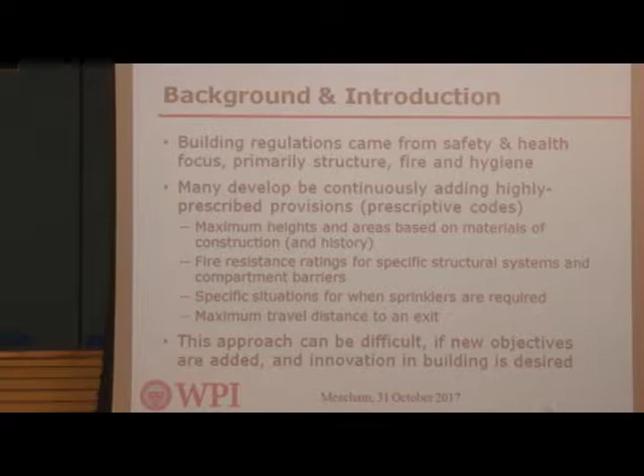Building regulation and fire regulation generally developed out of the health and safety area, because we were very good at burning down cities 100 years ago. So somebody decided maybe we should put in some regulations to try to control for that. We instituted measures like limiting the heights of buildings, the areas, compartment size, trying to make access easy for the fire service, defining how large compartments should be, fire resistance, and we kept adding all of this regulation, specifying everything that needed to occur.

The problem is, in many countries, not all buildings fit that very tight prescription, and it can be difficult to innovate in the design when the regulations are very restrictive.

So starting around 1980, there was a movement to transition to what they call performance-based codes. The idea is that the regulation focuses on societal goals like safety in case of fire. You define a functional requirement, something like provide adequate means of escape given the fire protection systems in the building, and then you put operative requirements such that the fire safety systems in the building shall be designed to maintain a tenable environment for the time it takes people to evacuate.

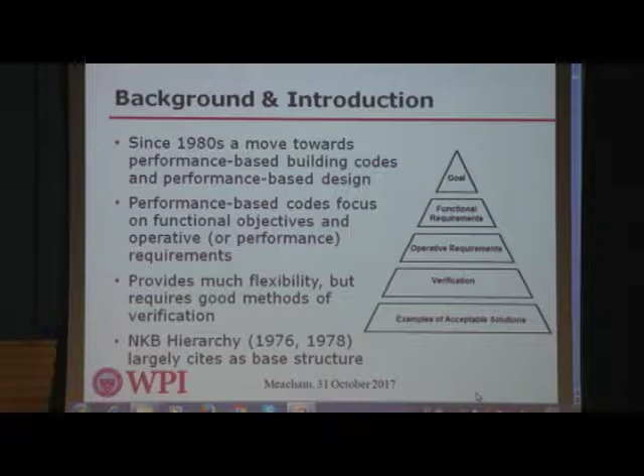So very clear statements of purpose with some criteria that you're trying to judge, and then you have means to verify through engineering analysis, but you also have examples of acceptable solutions, which in many cases are what used to be, or are still called, the prescriptive codes.

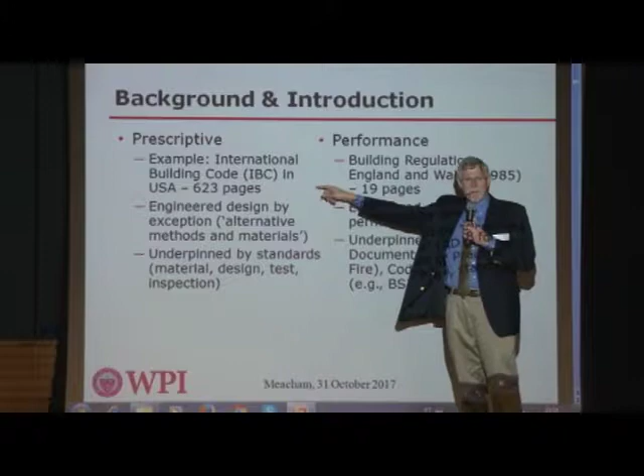You can see a difference, for example, in the United States: the International Building Code is very prescriptive, 623 pages of text to tell you exactly how many meters to an exit, what the fire resistance is, and it works very well if the building looks like a square box no higher than 4 stories. But with very unique designs, it's very difficult.

In England and Wales, the regulation is only 19 pages. It basically just tells you to make the building safe. So we can do engineered design by exception in the US, but in the UK, it's permitted by law.

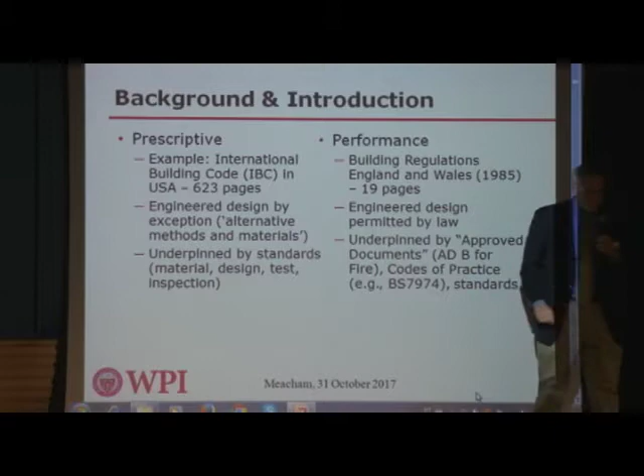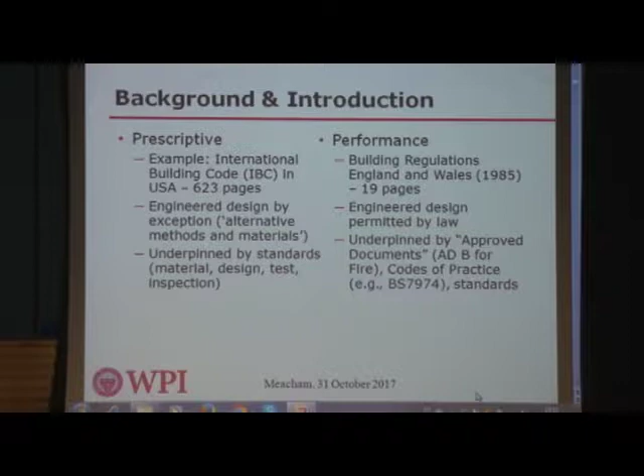Both sets of regulations are underpinned by clear standards for testing of materials, design, and so forth. But it's really an issue of: do you start by telling everybody exactly what they have to do and then allow exceptions, or allow people to do whatever they want and have most default to the very specific guidance anyway? That's really the difference between a prescriptive-based system and a performance-based system.

The prescriptive system is very good for regulators because it's easy to determine by looking at the drawings if the design complies with the regulation. They allow engineering, but it's by exception, and it's a little difficult if you want a very unique design because not all buildings look like a box.

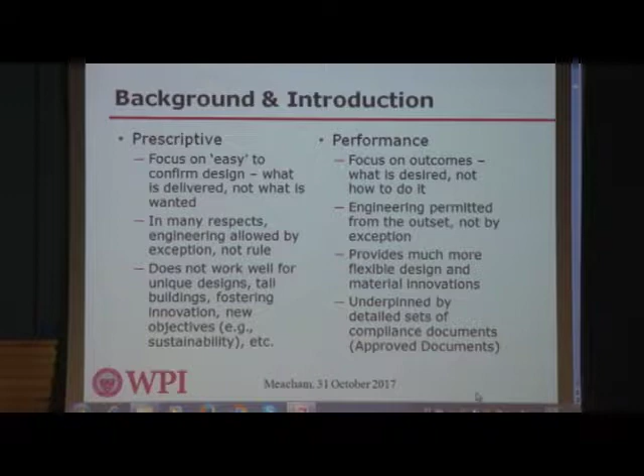Performance focuses on what you're trying to achieve with the building, not specifically how you do that, and it gives the engineer and architect more flexibility, but it's very difficult for regulators and the fire service to determine if the design actually achieved the objectives. So each system has benefits and detriments.

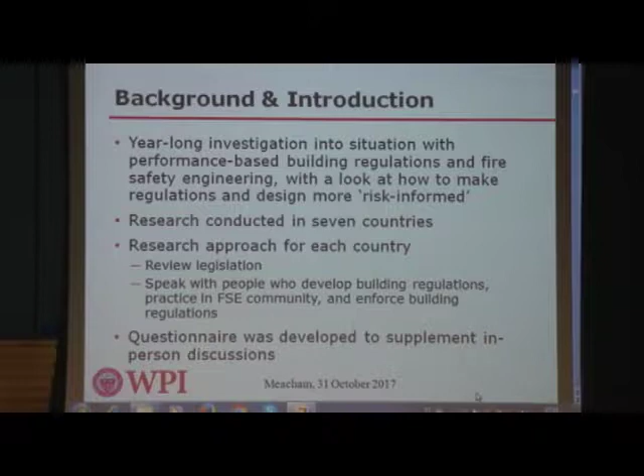So for the past year, I've been going around the world looking at how, in particular, the performance-based building regulatory systems have been working in 7 different countries. I've been talking to regulators, fire service, architects, and engineers, trying to get a sense of what is working and what is not working, and what we might want to look at differently in the future. So I'll go through a few of the countries briefly.

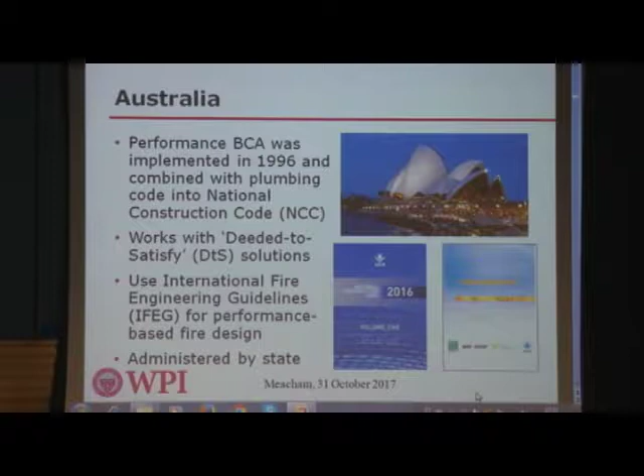Australia has the Building Code of Australia, implemented in 1996, which is a performance-based document. It combines goals and objectives with a prescriptive deemed-to-satisfy component. For engineering analysis, there's the International Fire Engineering Guidelines, which lays out a process for identifying building objectives, developing fire scenarios, quantifying design fires, conducting analysis for smoke and fire spread, and even includes a fire brigade response model.

Within Australia, fire safety engineers are required for design, but they're only required to be licensed by law in one state. This makes it challenging, because without the legal infrastructure to define what competencies the engineer should have, it can allow for bad practice in reality.

Another issue is that Australia allows the use of private certifiers, meaning the government doesn't do the approval like City Hall. A private entity can be contracted to conduct the review and certify the building. In theory, this would reduce cost. In practice, an unethical reviewer can pick design engineers they want and not do a good design or appropriate review. So you have to be really careful with private certification, because the oversight and ethics need to be very high.

We saw earlier a picture of the Grenfell Tower in London that happened this year. But three years ago in Melbourne, Australia, there was the Lacrosse building fire, which had the same combustible exterior facade. They were lucky no one died, but the Victoria Building Commission audited 151 buildings and found that 51% did not comply with building regulations. They saw this as a potential issue with private certification and what could happen without good oversight.

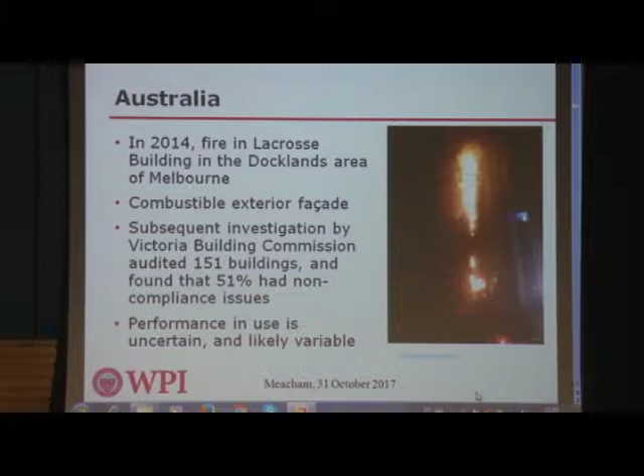The engineers recognize that there are no regulations requiring building owners to maintain their buildings, to require annual inspections, to make sure fire safety management is correct. This is important, because you can do a very good design as an architect or engineer, but if the building owner doesn't maintain the building according to the design, you have no guarantee of the performance expectation.

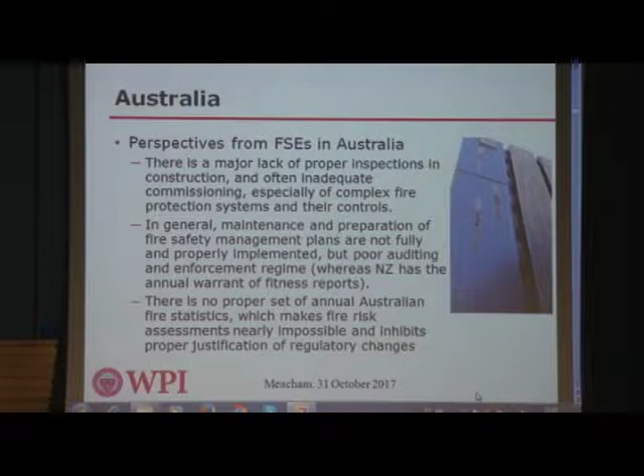Also, Australia does not have a good set of fire statistics. The fire brigade stopped reporting statistics about 10 years ago. It's very difficult to understand how large the fire safety problem is or what the particular components are without good statistics. This should change, because whether in Brazil or any country, when you have the data, you know where to focus your resources.

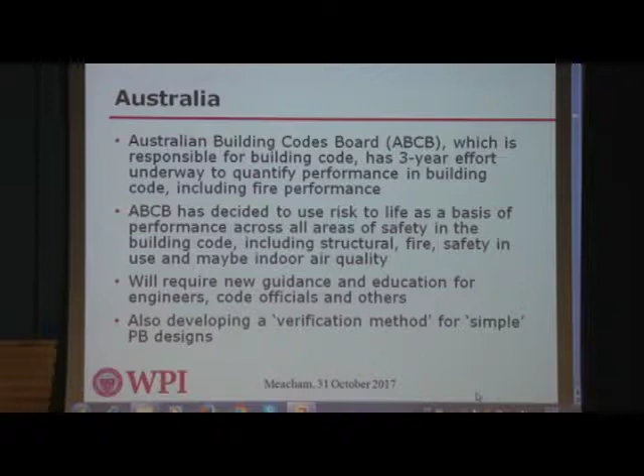So the Australian Building Codes Board is moving forward and changing their building code. They're keeping it performance-based, but setting a single metric of risk to life as the basis for performance. In the future, fire safety engineers will have to demonstrate that they're not exceeding a particular risk-to-life level with the combination of materials in the building, and building owners will have to follow that as well.

So I'll switch now to New Zealand. New Zealand has had performance-based building regulation since 1992. They also have fire engineering guidelines, but recently they developed a verification method which has more detail for fire safety engineers and reviewers to follow.

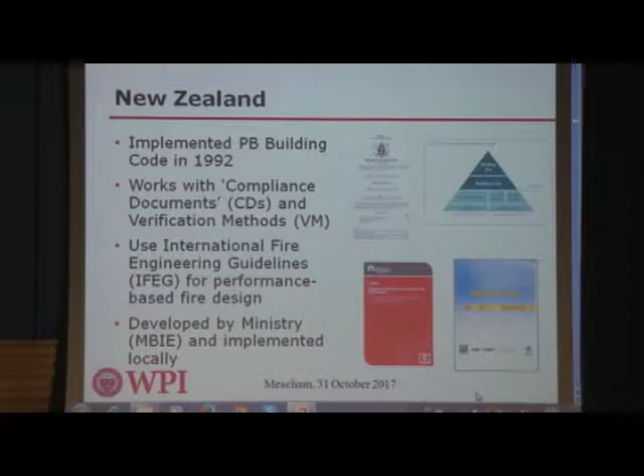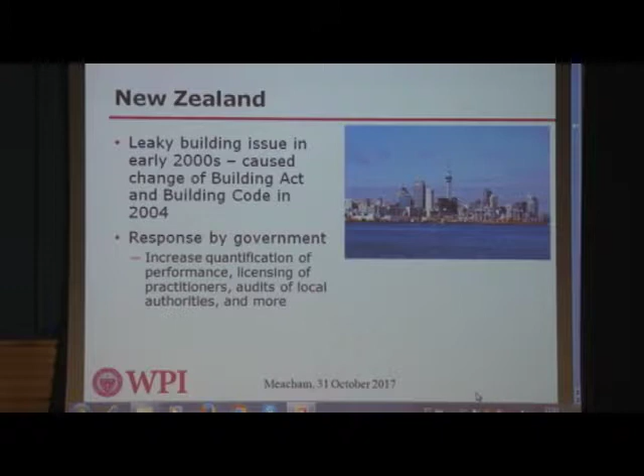So just a little bit of background. In the early 2000s, New Zealand had a very big problem with moisture control in buildings. They had a lot of moisture coming through the exterior facade, causing rot within a lot of the timber construction, which led to about a $2 billion impact on the New Zealand market. So the government changed the regulations and really wanted to focus on better quantification of performance, licensing of professionals, audits of the regulatory authorities, and more to try to get some oversight.

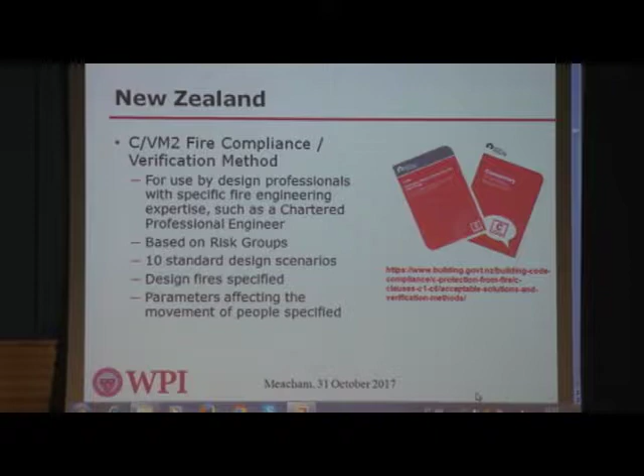As part of this change to more quantification, they developed a fire verification method, which is based on different risk groups and different building uses, but has defined fire scenarios that the engineer has to use, a defined fire size, and even very specific modeling parameters. So I'll just show a few of these things.

And if you're in an industrial facility, you have to use a 50 megawatt fire. The reason for this is that you're testing the performance of the building and you're testing your fire safety design. If you use too small of a fire, you don't get an indication of what could happen if those systems fail.

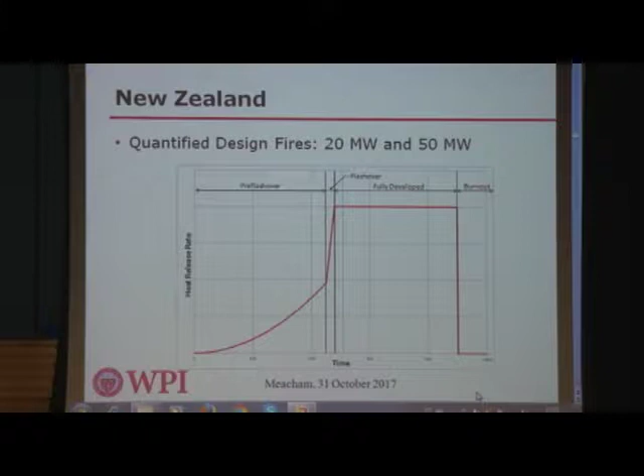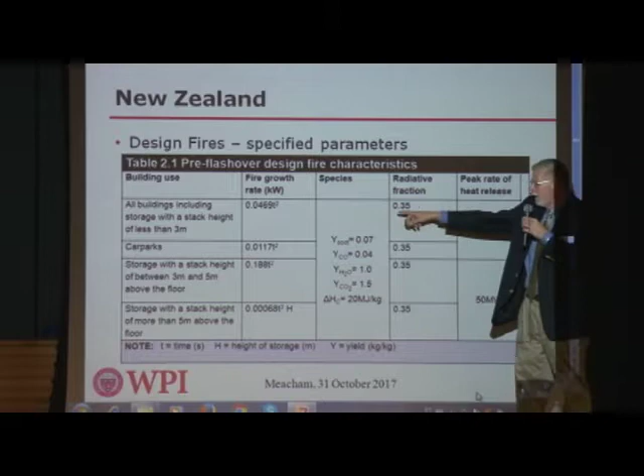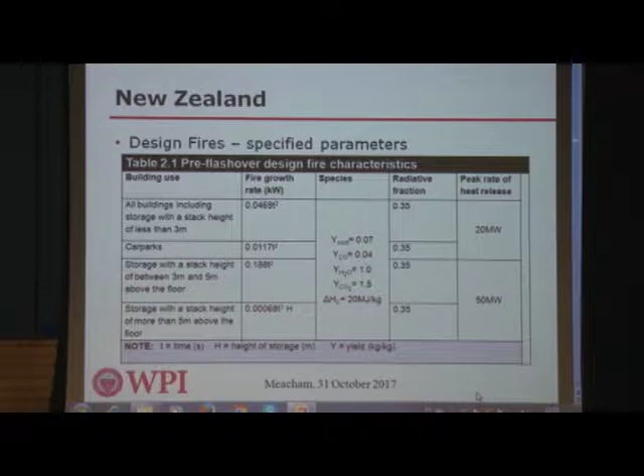Fire safety engineering design also uses quite a bit of computational fire modeling these days. This design guide is also telling you what the fire growth rate should be, the production of things such as carbon monoxide, carbon dioxide, soot when you're predicting the smoke movement, even things like the radiative fraction, which impact burning rate, and again, the heat release rate.

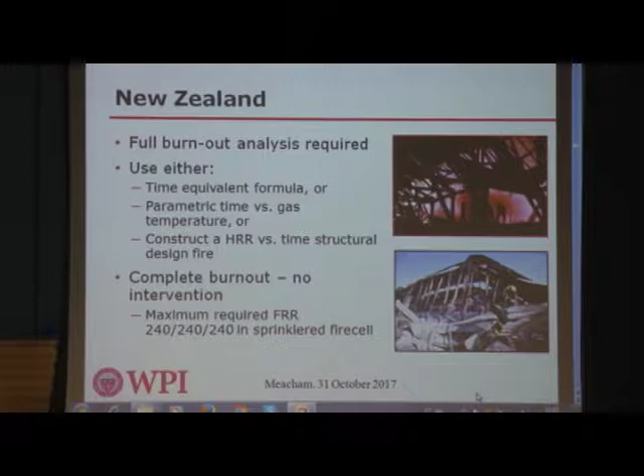So the idea is to be very specific on the load that the building is expected to withstand in the case of the fire. And for structural analysis, you have to do a full building burnout. So you have to show that the building will withstand the fire based on the analysis, or you have to default to basically a 4-hour fire resistance construction. So it's really intended to put a lot of control.

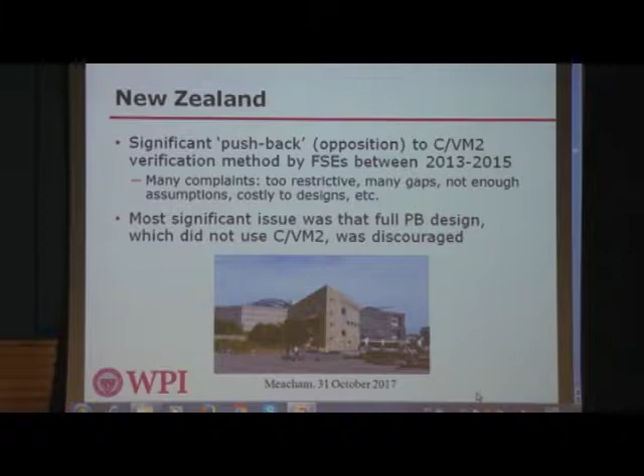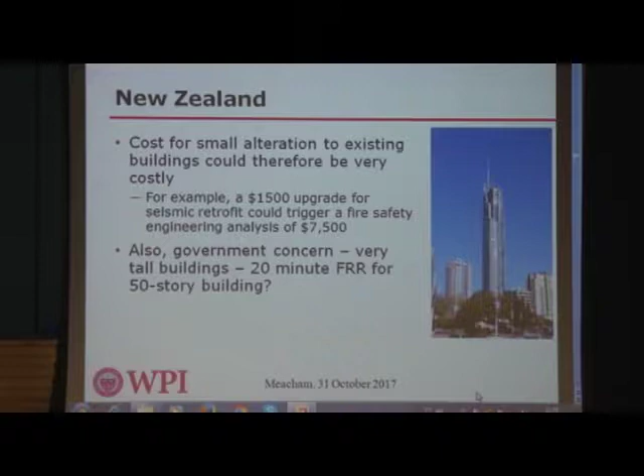Now, some of the industry thought it was too much control, and they pushed back a little bit. So the government has modified it a little bit to the point where the verification method is used for most buildings, but if you have a truly unique design, you can do fire engineering from first principles, but it's a much higher review process that you have to go through. They also had some issues with tall buildings, but I'll talk about tall buildings more this afternoon.

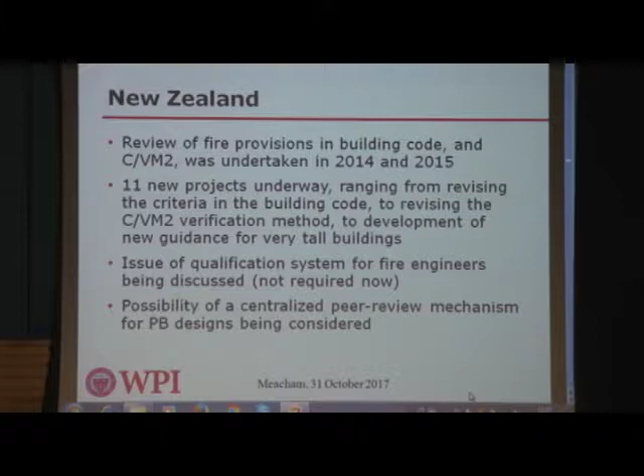So one of the other attributes, the government is doing a lot of work to try to address some of these concerns, but similar to Australia, there's no requirement for a specific fire engineering qualification. They see this as a problem because anybody can call themselves a fire engineer, and the market generally doesn't know how to assess qualifications, and they can get a bad designer. So this problem of lack of qualifications is a problem in New Zealand as well as Australia, and they're looking at mechanisms such as licensing, but also a central review body with qualified experts to look at some of these very unique designs to make sure that the quality control is much higher.

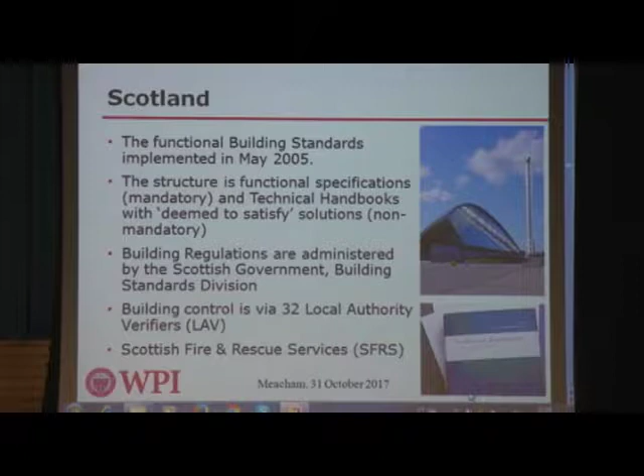Moving on to Scotland. Scotland has what they call a functional building regulatory system, which is essentially the same as performance, where they have functional statements in the regulation, and then they have technical handbooks, which are more or less the prescriptive, deemed to comply type of documents.

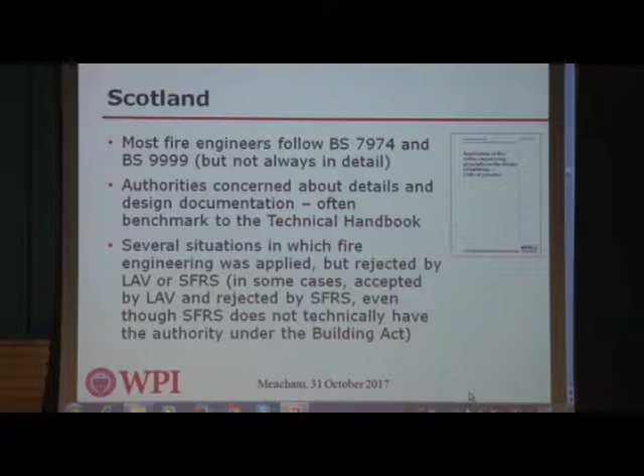For fire engineering analysis, most engineers follow British standards, so BS 7974 and BS 9999. Part of the problem is that BS 7974 in its 8 parts is very detailed, which is very good. But the authorities are finding that many of the engineers are not following the guidance in total. So they write a statement saying, we followed the principles of BS 7974, but when the fire services and the building authorities review the design, not all the components are there. So it's really not appropriate to say you're following a specific standard or guidance if you're not following it in total, because it's there as a package to make sure that everything is working appropriately.

So there is some concern that even though the regulatory system is functional or performance-based, it's really being interpreted as prescriptive. Part of this is because local authorities look to the technical handbooks as the first base instead of allowing the engineered design initially, because they don't fully trust the engineers. So they make the engineers demonstrate the differences to the technical handbooks.

So here again, we have this challenge with the qualifications of the engineers, but there's also an issue with having appropriate qualifications for the people reviewing and approving the designs. They need to be at that same level to have confidence that the design is actually meeting the objectives.

So Scotland right now, as a result of some work I did a year ago, is looking at developing a qualification system both for engineers and for the local authority verifiers. It's probably going to follow the Institution of Fire Engineers Chartered Engineer status, both for the engineer and the reviewer. But in England and in Scotland now, even though you can become a chartered engineer, it's not required by law. And that's the big difference.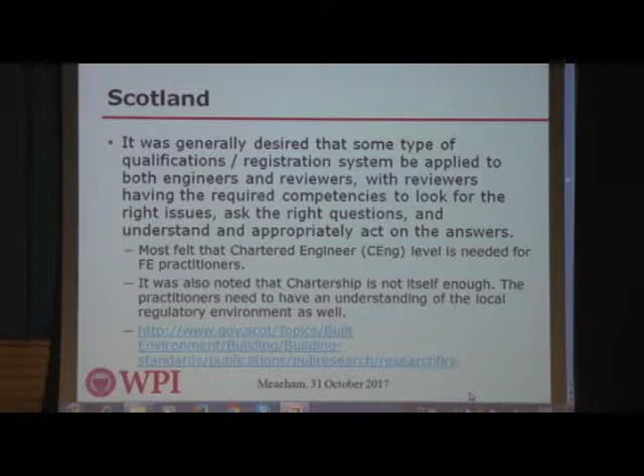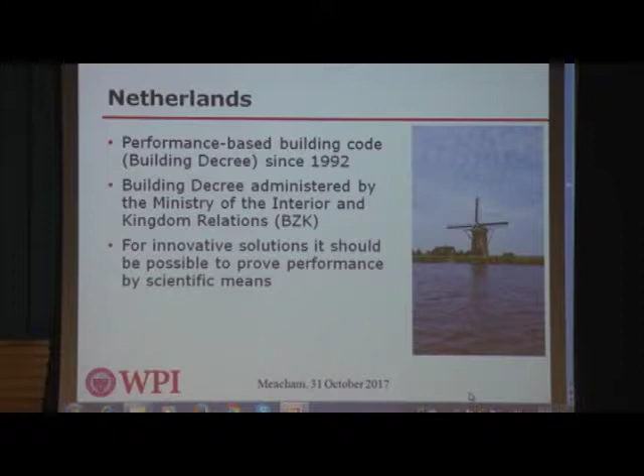The Netherlands has had a performance building code since 1992. They have a large focus on developing innovative solutions, but unfortunately fire safety engineering is not very well developed there. There's no university programs in fire safety engineering, though they have a lot in civil engineering. They have this big challenge of keeping the ocean from flooding their country, so the civil engineers are very strong and they've done a lot of work with probabilistic methods.

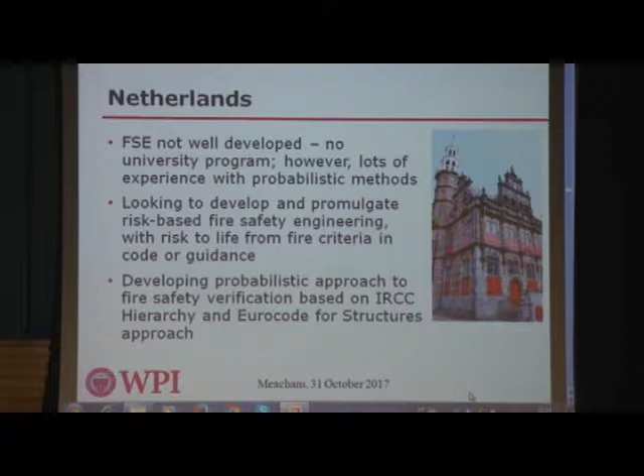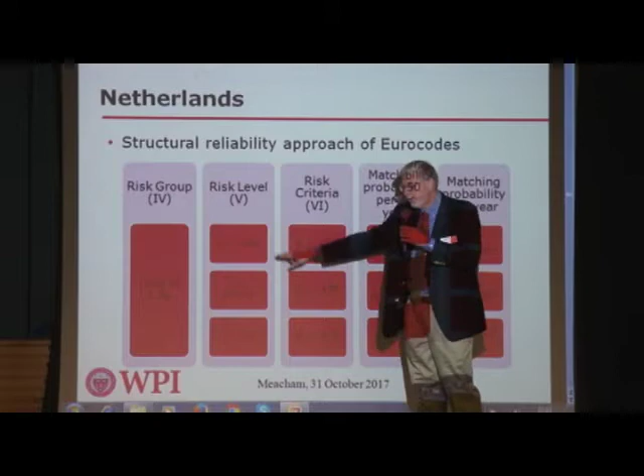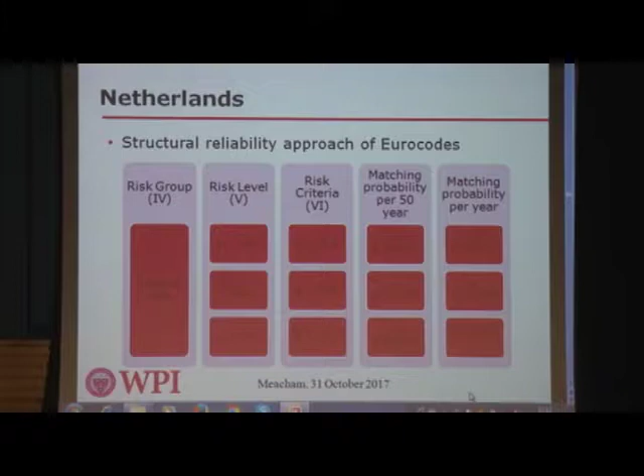So now the fire safety engineers are thinking, because we have all this knowledge on probabilistic design due to flood, can we bring that in to have a probabilistic design for fire safety? Where other countries use a more deterministic or process approach, in the Netherlands they're looking at following more of a structural reliability or probabilistic approach to design, focusing on life safety. You have 3 different risk levels for buildings, and a probability of occurrence of event and safety to life that would be the guidelines for design. This is the current approach they're developing. I'm not so sure they'll implement it anytime soon, but it's a rather interesting approach.

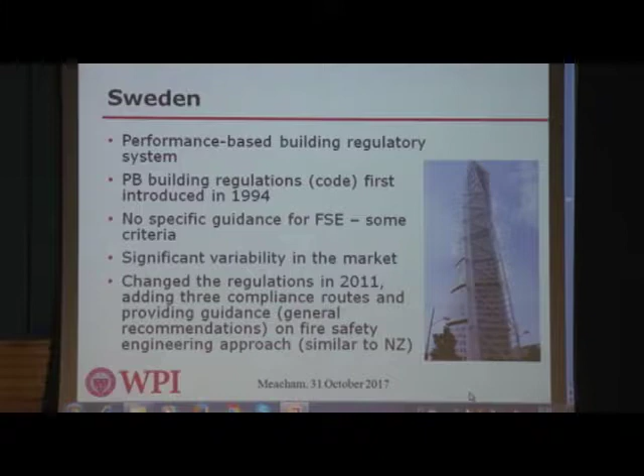Sweden has had a performance-based system since 1994, and with their initial regulations it was very open. It didn't have much guidance, and that caused a lot of problems in the market because there were different interpretations by engineers, by the regulators, and others. So in 2011, Sweden changed their building regulation and put more specific requirements on the design fires as well as the acceptance criteria, very similar to what New Zealand did.

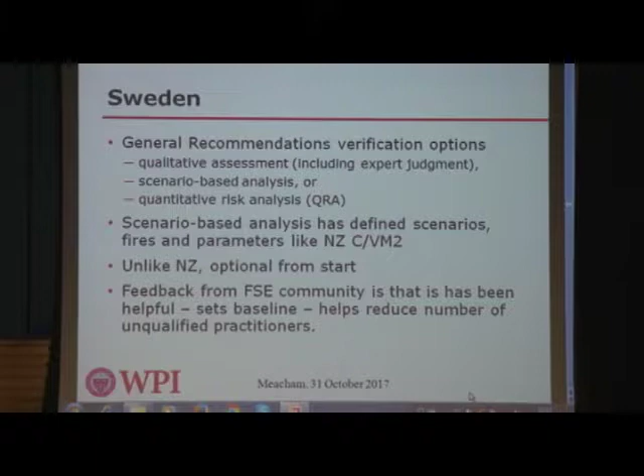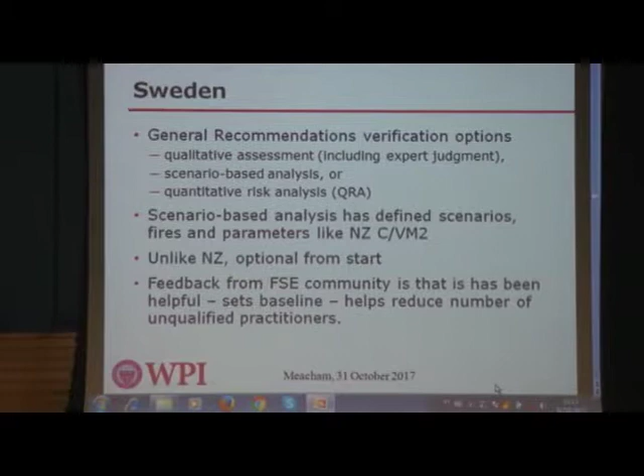There's a document called the General Recommendations, which deals with verification of design, and there are 3 approaches that they allow: a qualitative assessment if it's a very minor design, a scenario-based analysis similar to New Zealand, or a quantitative risk analysis. I'll just talk a little bit about the scenario-based approach.

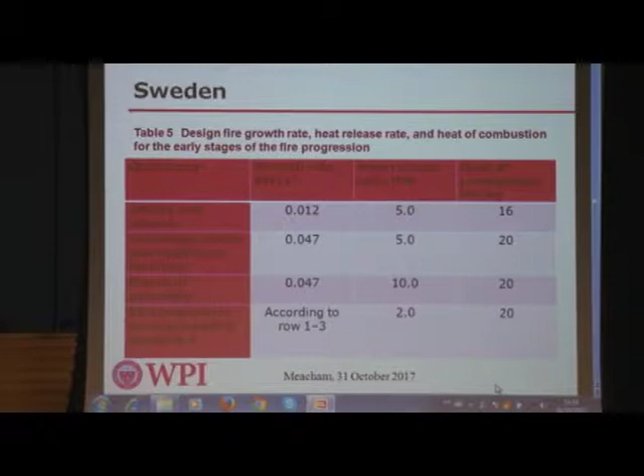Similar to New Zealand, it gives you fire growth rates that the engineer has to use, heat release rates, and fire load so that you can look at the initial stage, fully burning, and post-flashover fire. What's interesting is that the heat release rate is 5 megawatts — if you remember, it was 20 megawatts in New Zealand. So there's a different philosophy in terms of what the size of the fire should be for testing the building. If you're developing a design guide, that would be one of the big factors that needs to be looked at.

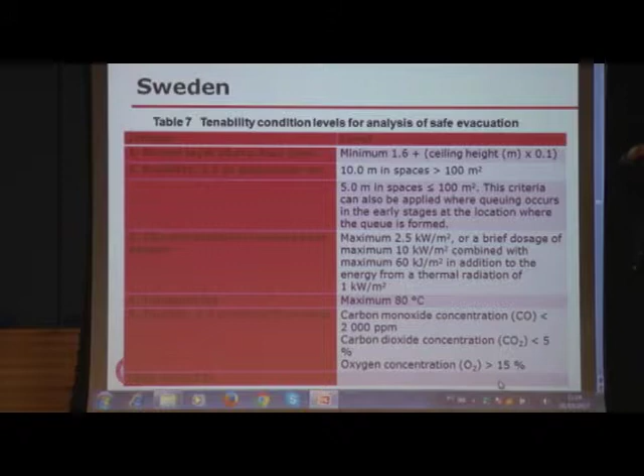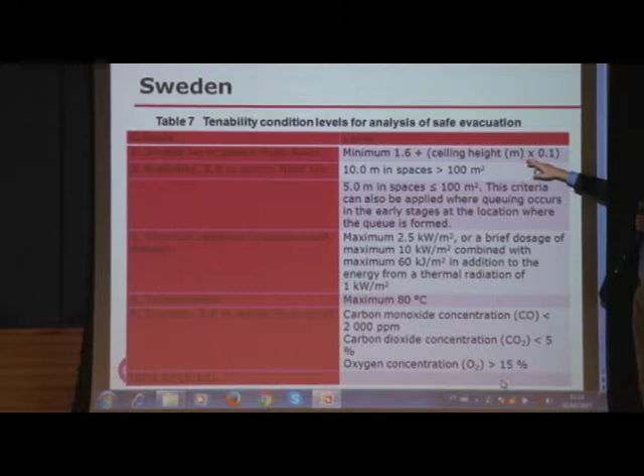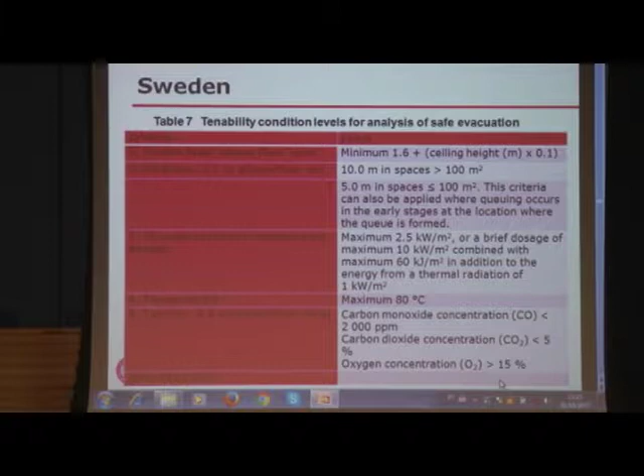Here's an example of some of the criteria they use. There's a defined smoke layer above the floor, so you have to have at least 1.6 meters of clear height, plus 0.1 times the height of the ceiling — so as the ceiling height adjusts, that level adjusts. There are different visibility requirements, 10 meters in a large space, 5 meters in a smaller space, maximum radiant heat flux that people would feel on their skin, and things like that. But it's very good if you're going to do modeling to be able to demonstrate what you think the fire is actually going to do in terms of impacting people as well as impacting the building.

Some of the observations from the engineers were that the change in guidance has been very helpful, but they see another problem. Sweden has a very long history of fire safety education — Lund University has been graduating fire safety engineers for about 25 years.

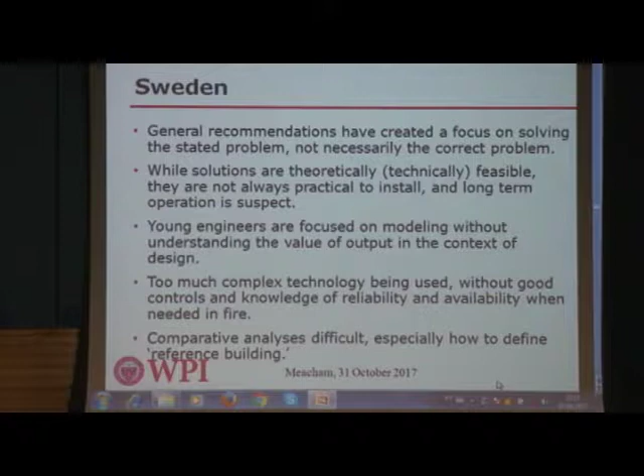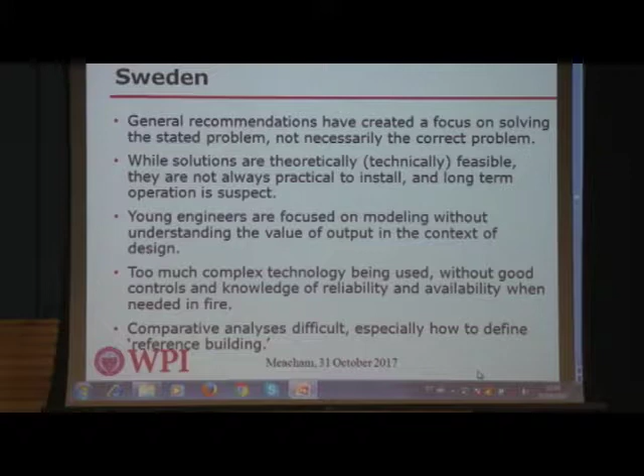The problem that some engineers, particularly the older ones, are seeing is that young engineers are very good with computer modeling but have no idea how to engineer a good design. They're used to computers because they play computer games, but they don't understand how to interpret the output in relation to what makes a reasonable design, and they come up with impractical designs. So here's a case where technology, which can be very helpful if not properly applied, can end up with a design that's even worse.

So there needs to be some controls. And if you get the presentation, this is just a link to one of the reports that I had written for Sweden.

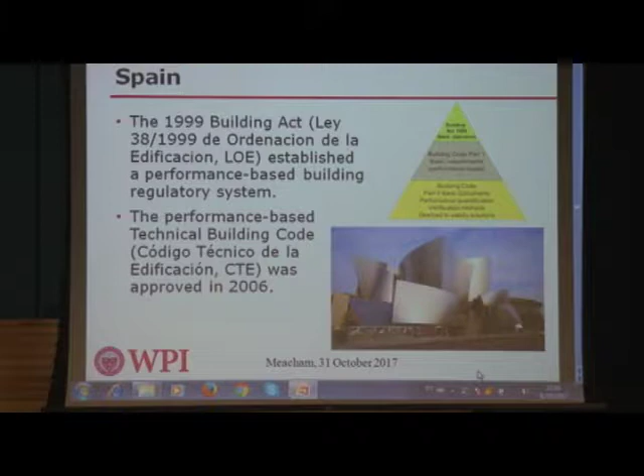Briefly on Spain, they have a performance building code as well. The Building Act was initiated in 1999, and the technical building code was published in 2006. A problem there, which as I understand is a similar challenge here, is that fire safety engineering is not recognized like architecture or civil engineering. There are no fire safety engineering programs, and there's no requirement to use fire safety engineering. So they implemented a performance regulation, but they didn't have any fire safety engineers qualified to do it. It's a rather mixed up kind of place.

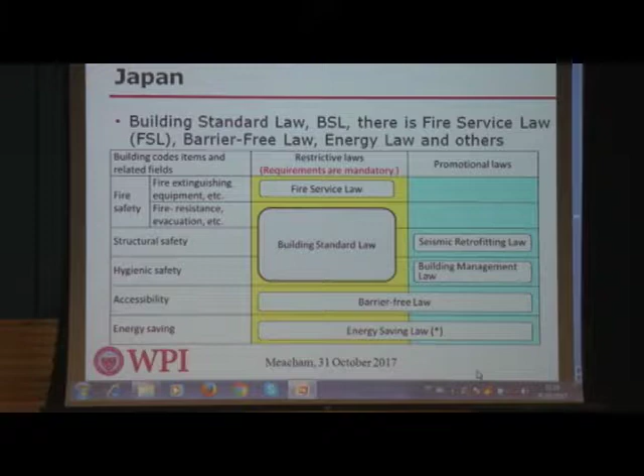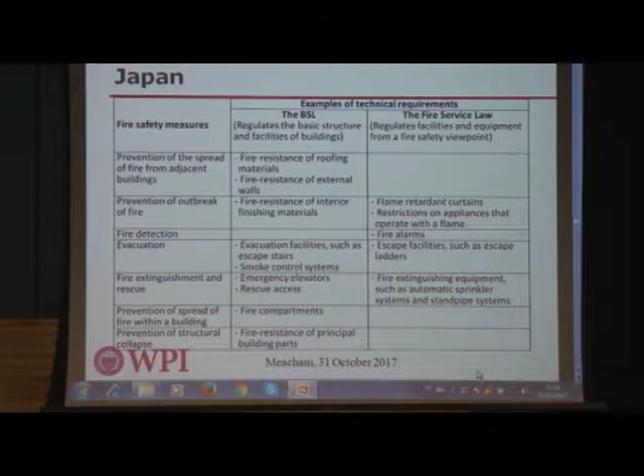Briefly on Japan: Japan is different than the other countries I looked at in that they have separate building regulation and fire regulation, the building standard law and the fire service law. The fire safety requirements are split between the two regulations. In the building standard law you get things such as structural safety in case of fire and evacuation, while the fire service law deals with active systems such as sprinklers and detection systems. This requires a lot of coordination between the building regulators and the fire service, because you have to look at both sets of regulations depending on what aspect of building fire safety you're controlling for. So if you're dealing with fire resistance, smoke control, and evacuation, that's building standards law. If you're talking about sprinkler systems, detection, communication, and fire service support systems, that's the fire service law. So in a design, all of that has to be very well coordinated, which doesn't always work.

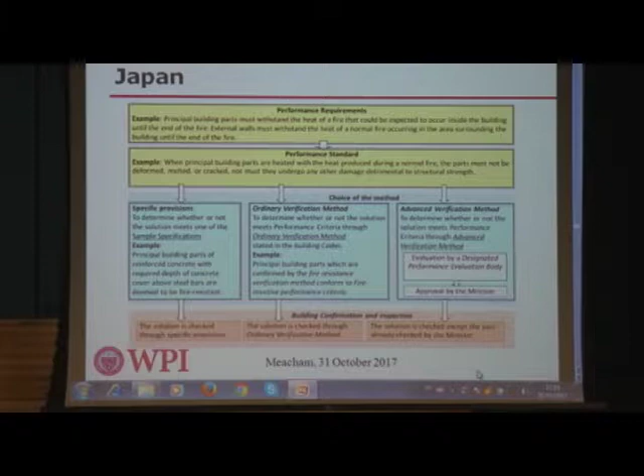The other aspect about Japan is that they have 3 different methods for verification. One is that you can just follow the prescriptive option in the code. The second is what's called the ordinary verification method, which involves very specific relationships between smoke filling and evacuation, or specific requirements for structural engineering design. Or you could go to a full performance-based design. If you take that last route, you have to submit your design to a panel of experts, put together through the ministry and approved bodies, who will do a complete review of the design. That panel typically consists of academics and researchers.

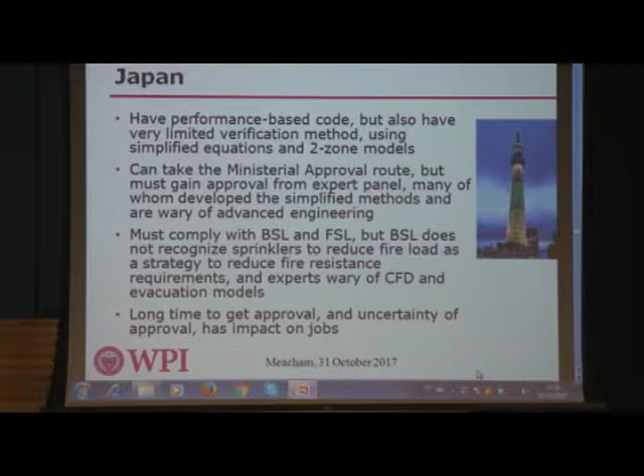So a short summary of Japan: they have a performance code and what I call the medium level verification method, but that's all based on kind of 2-zone models and simple equations. If you want to do a full performance design, you have to get ministerial approval, but it's difficult to get that approval. So there are a variety of challenges, and with that long time to approval, fewer people do the full performance design because of the uncertainty in the end.

I know I'm going quickly, but I'm trying to get everything in here a little bit. One other thing that I did after going to the countries was to post a survey online through SurveyMonkey. I asked engineers around the world - I had a few engineers respond from Brazil, and 400 respondents in total. Most of the people were from Australia, New Zealand, Sweden, Scotland, US, and Spain, because those were the countries I visited.

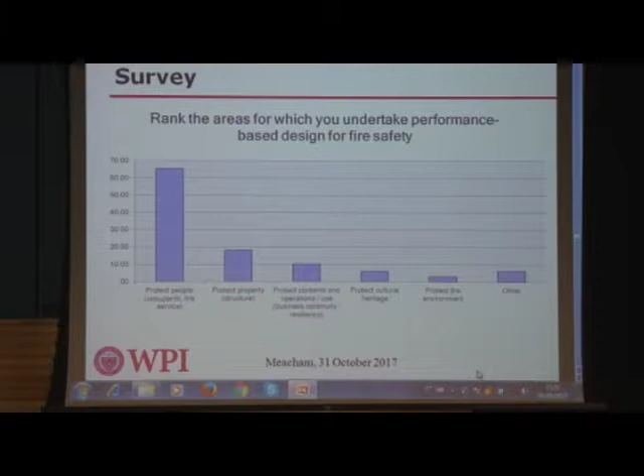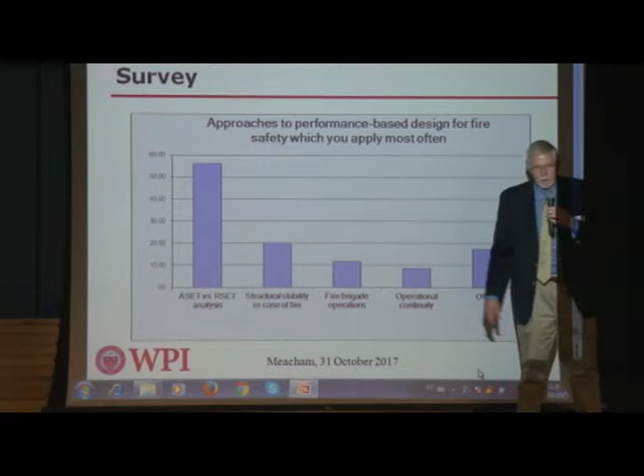If we look at where people are doing actual fire safety engineering - I know it's difficult to read - the first bar is to protect people, so life safety analysis was the primary means for doing fire engineering, and the second primary area was property or structural protection. If you look at the methodologies people use, because it was life safety, the most common is what we call ASET-RSET, available safe egress time compared to required safe egress time, with the second most analysis being around structural stability in case of fire. It was also interesting to see a fair number of analyses related to the fire brigade.

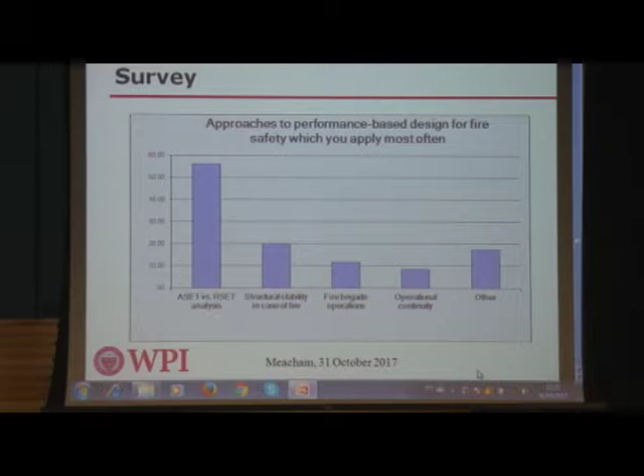This is important because in many countries there's a requirement not only to protect the safety of the occupants, but to provide reasonable protection to the fire service while they undertake rescue and suppression activities. That's where structural stability and fire brigade operations analysis becomes important, because you can't just design the building with enough time to get occupants out and then let the building collapse on the fire service. You have to design the building to allow the fire service to undertake their operations. I think that's a very good part built into some countries' codes that is really important to consider.

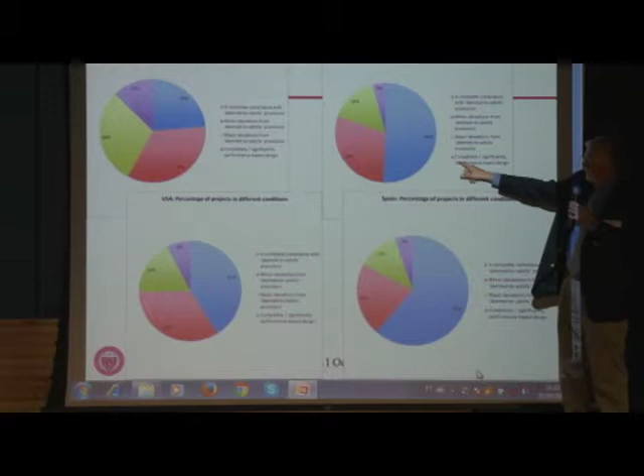I apologize, this is impossible to read in detail, but the next few slides show percentages of different aspects of design. This asks, in different countries, what is the way you mostly undertake your design? The blue is compliance with the prescriptive or deemed-to-satisfy approach, and the purple is more performance-based. You can see in Spain it's mostly prescriptive, in Scotland as well. If you look at the green and purple, in the US and Australia much more engineering analysis is undertaken. It's interesting to see how that differs from country to country.

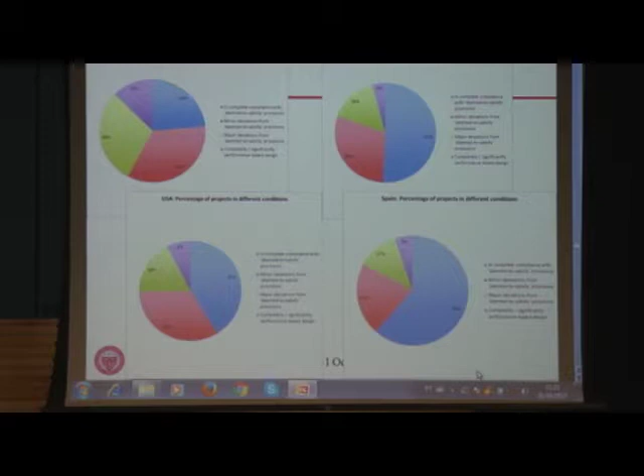Some of this is a function of whether you have requirements for qualifications of engineers and all the support mechanisms. Even if you have that type of regulatory system in place, you can't work with it unless everything else is also in place if you want this kind of approach to succeed.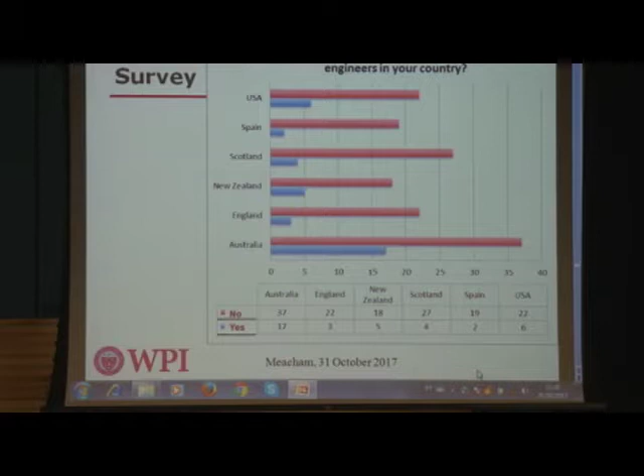This is just another point of caution in terms of how far you can go, and how quickly, to make sure you're delivering a good level of safety in the environment. These are some breakdowns about whether or not you have enough qualified engineers. In all countries, even the US, where we've had fire safety engineers for 50 years, we don't have the capacity to meet the demand of the market, both in design and in fire service and building control.

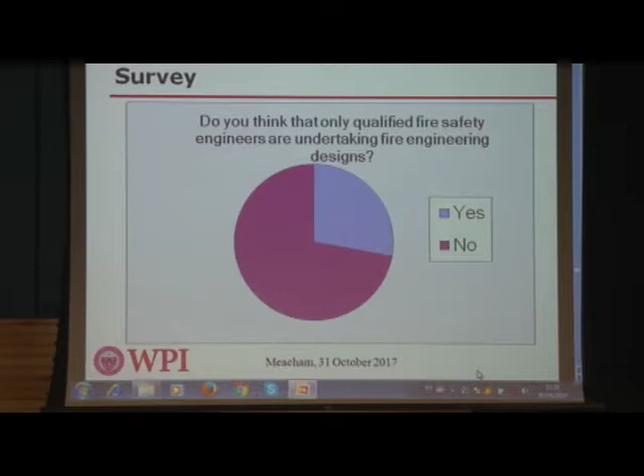The disturbing part is that about 75% of respondents think that non-qualified people are undertaking fire engineering designs. This is the problem when you don't have a good qualification system, because that type of situation leads to buildings with problems like Grenfell and others. If you don't have the right qualified people doing designs and review, and you don't have a good fire safety management culture, you can get into very difficult challenges.

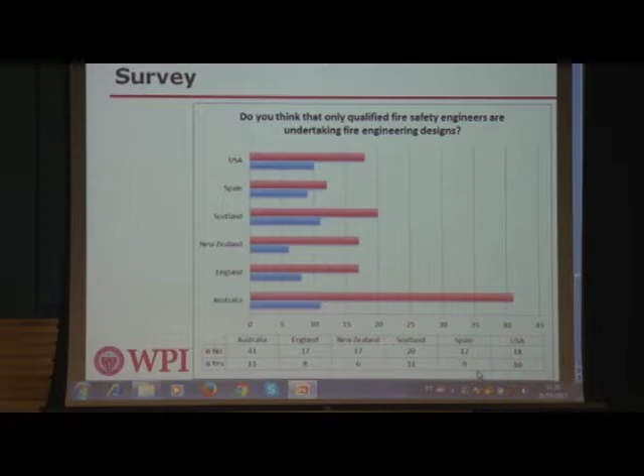Here, the US thinks they're doing a little bit better. Australia is really concerned about how many unqualified people are undertaking designs, at least in the determination of the market. And this is a similar graph asking whether the people reviewing the designs are qualified.

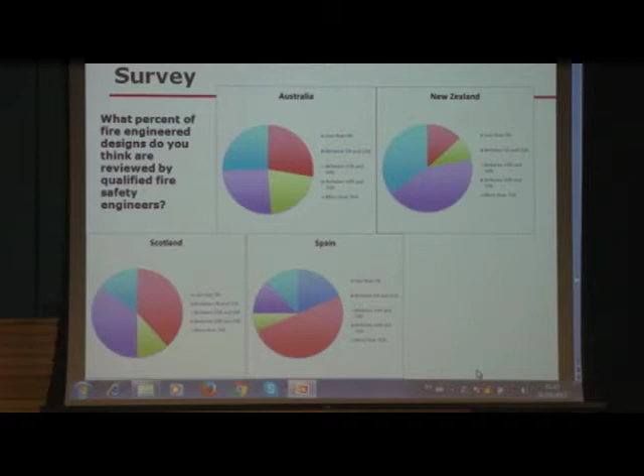The blue colors and the red colors are bad, they're the low end. So again, it's no surprise Scotland and Spain that had the big concern with the quality of engineering also has the biggest concern with the quality of review and approval.

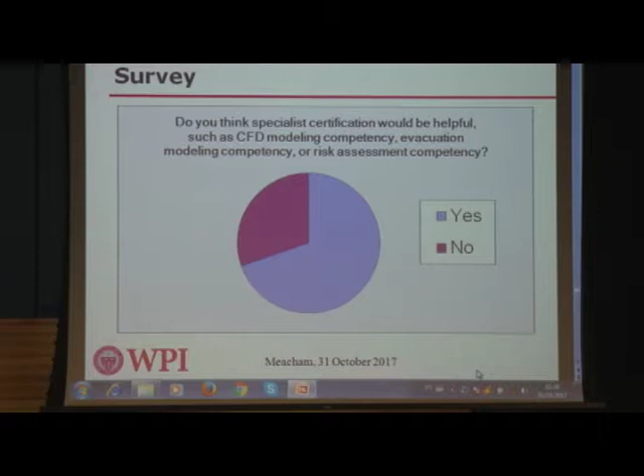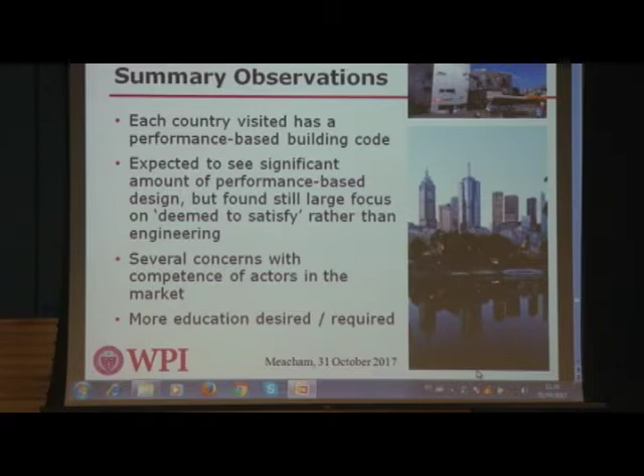So a few summary observations. Every country I went to has had a performance-based building regulatory system for a number of years. I expected to see a lot of performance-based design being done, but mostly it was still following the prescriptive or deemed-to-satisfy solution. A large part of that was that the market didn't think they had enough qualifications, and there's not enough educational programs to develop competent engineers and practitioners.

Across all countries, somewhere in the range of 5 to 10% are performance-based fire safety engineering design. Maybe around 10 to 20% are deviations from the prescriptive requirement, and 70 to 80% of the time, they're just following the prescriptive code. There's a lot of reasons for that: inadequate measures in the code, inadequate number of engineers and reviewers, and a not very good review process.

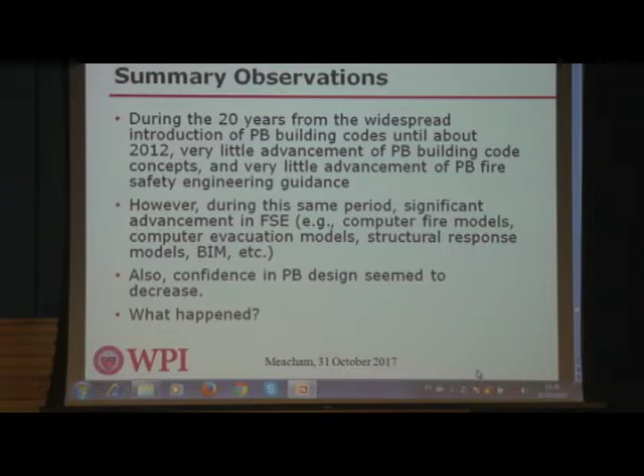So I asked myself, if we've had performance-based regulations for 20 or more years, how come we haven't advanced further with fire safety engineering and the performance concept? We have the performance, but it's not quantified. If you don't have clear quantification of the acceptance criteria, the scenarios, and the fire, it's hard to design. That gets more complicated when you don't have qualification systems for the engineers. And if you don't have the education to qualify the engineers, then you just have a really big problem.

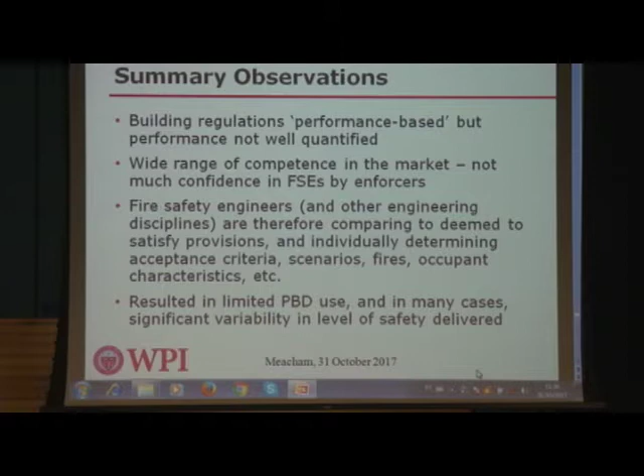For some of the countries that have had this situation for a number of years, I find this graphic from the technology industry very interesting. Basically, it says that some type of new technology or innovation occurs, and everybody jumps on the bandwagon. Everybody wants to use it.

Performance-based design is great, we're going to adopt it. And then you start to find out what it actually takes to do that, and you start to get disillusioned with the actual time it takes, the cost, the recognition, and so forth. So you fall into this trough of disillusionment.

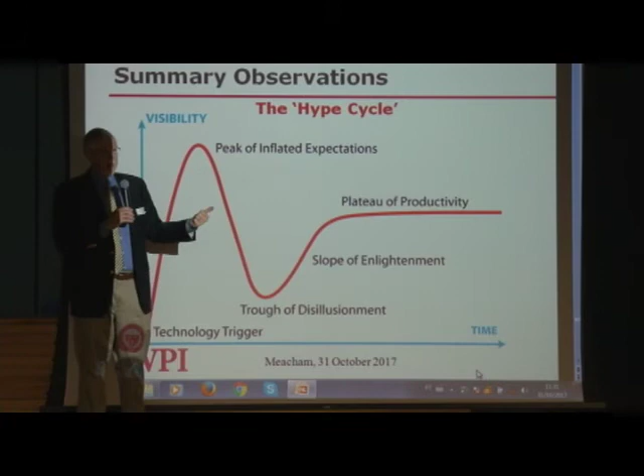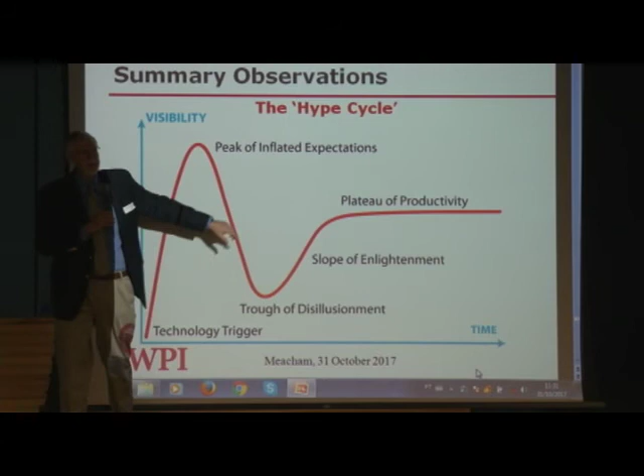Then you have to claw your way up the slope of enlightenment, when you find out how much infrastructure you have to put in for education, training, competency, and certification, until you get to a level where you're working productively. So I think we are now, in many countries, moving up to a steady state, but it's taken many years to really determine all the shortcomings and how much infrastructure and education and training is needed to make the system work effectively.

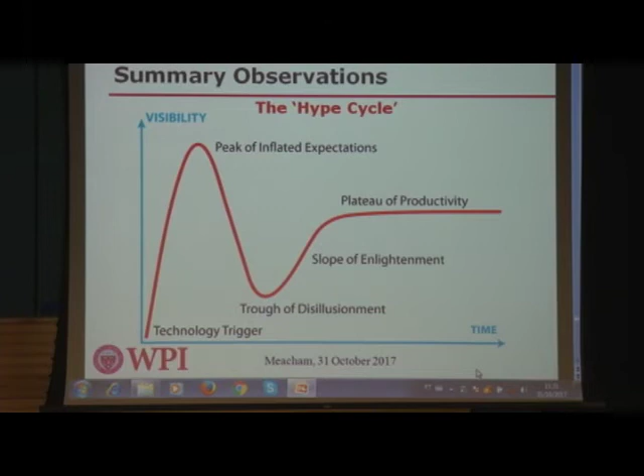Moving forward, many countries are taking steps to add more quantification into their performance codes to help deal with these issues. They're trying to get more guidance around the qualifications of practitioners in the market: what is the minimum, how should licensing happen, and how do we determine competent participants?

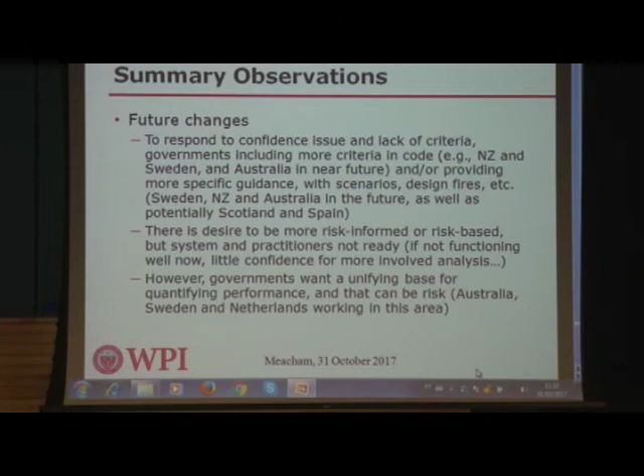Some of the more progressive countries are trying to go further and say, we're worried about risk to life, we'll make that the fundamental unifying criteria. That's just going to mean more education is required as we move along.

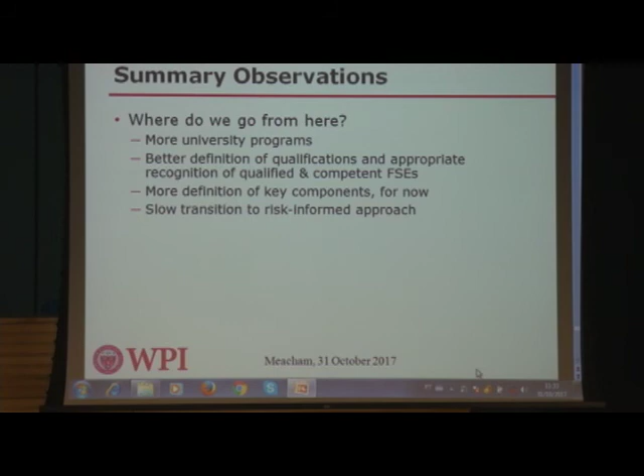Going forward, for me, it's very clear we need more university programs producing people at all levels—engineers, qualified technicians, authorities—who understand the concepts and how the engineering works together. We need better definition of the qualifications and competencies of fire safety engineers and what their expectations are relative to building design. We need to define all of these components so that I have the same interpretation as everyone else, to avoid confusion. I think eventually we'll go to more risk-based methods, but that's probably another generational shift.